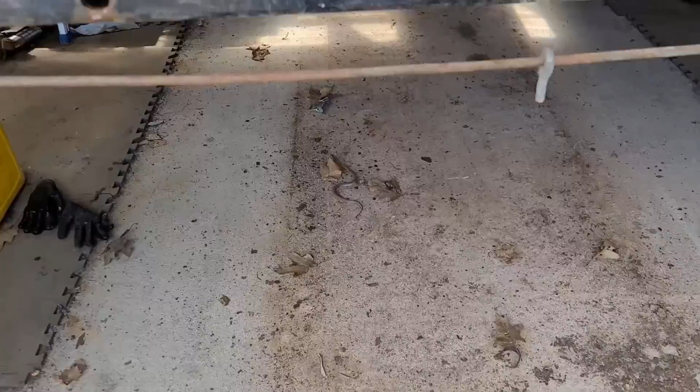We are the 12th of April, and what I'm going to be doing is changing out the upper control link on the 07 Dodge Nitro. Unfortunately, I've got to drop the fuel tank to do that. So of course I've scoured YouTube trying to find somebody who's done it, and nobody has. So guess what, this will be a first.

It couldn't be simple like that one over there, like the one I just took out of another Nitro.

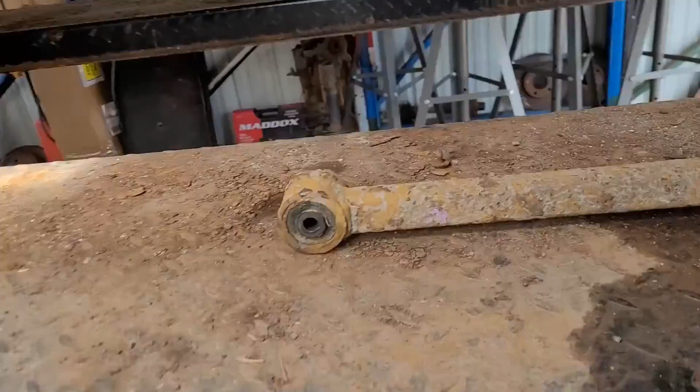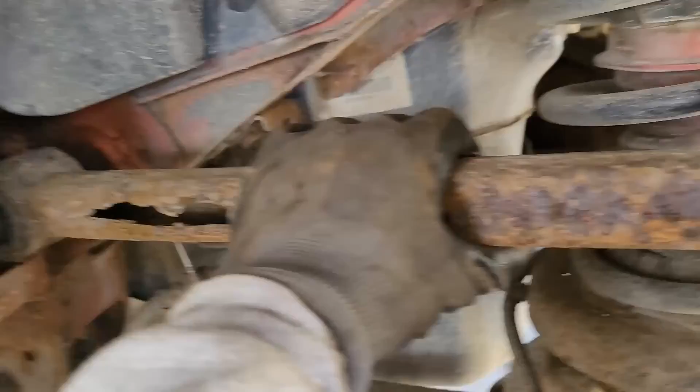So this is what we're replacing, this link here. First thing, we gotta get the wheel off. Okay, remember right now the wheel's off. And this is the link that we're changing. You see that? Isn't that freaking beautiful? Check your vehicle, this is an 07. So the other links look good, even the passenger side upper link is in good shape.

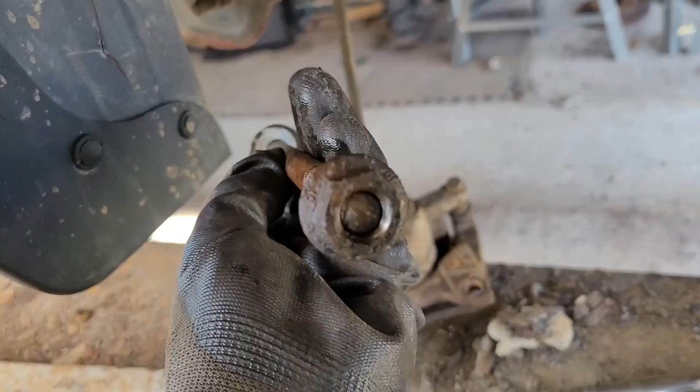So what we got here is 18 outside, 15 on the inside. 18 outside, and this is what it looks like. Okay, so you get 18 on the end. This goes into a slot in the frame. Okay, there's no nut on the inside, so unfortunately what you do is you pound it through.

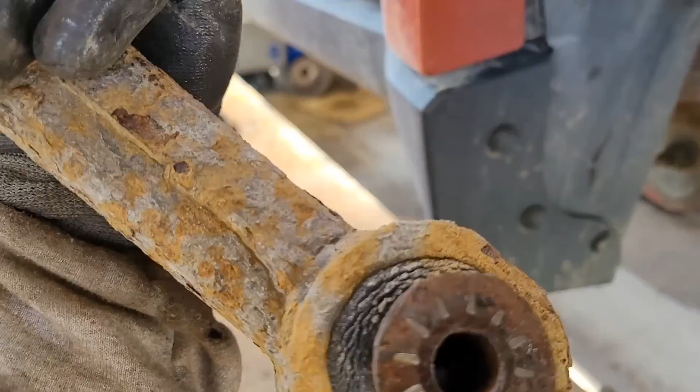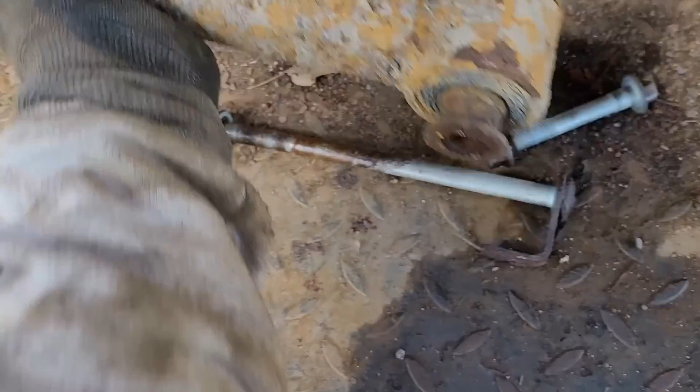See, what you're looking at here is that. So you get this big sleeve, and what happens on two of them that I tried to get this off of, your bolt locks itself inside that sleeve. It doesn't pivot, because it pivots the rubber, the rubber is what pivots.

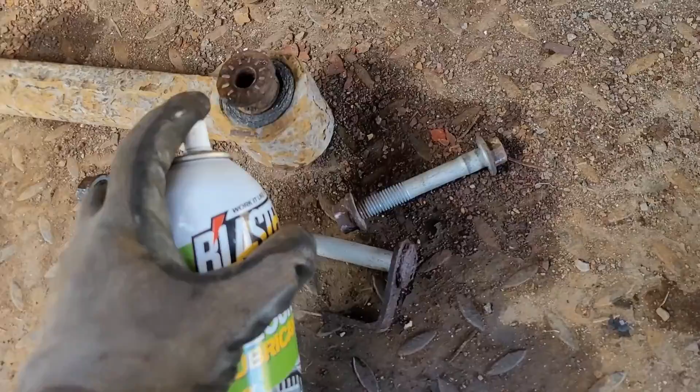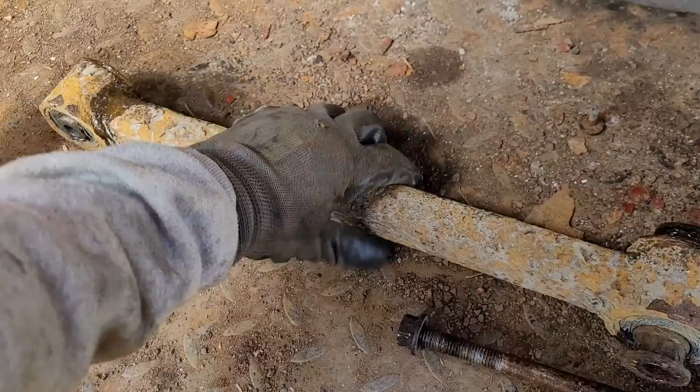Let me get some silicone and I'll soak it into that rubber. Yeah, I'll give it some silicone. It soaks into the rubber, makes it last a little bit longer. Alright, so there we go, we'll get that in there.

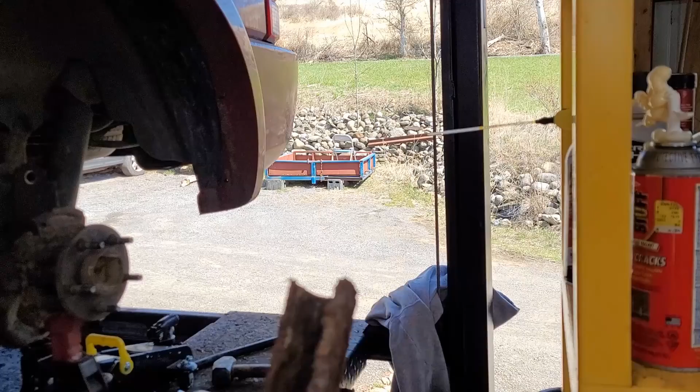And I think what I'm going to do, I tried pounding on that, I can't get it to break loose, so it's definitely frozen in there. So I'm going to wind up cutting it. I decided to go ahead and cut it off. As you can see, there's nothing, absolutely nothing left of that thing. That could break at any time.

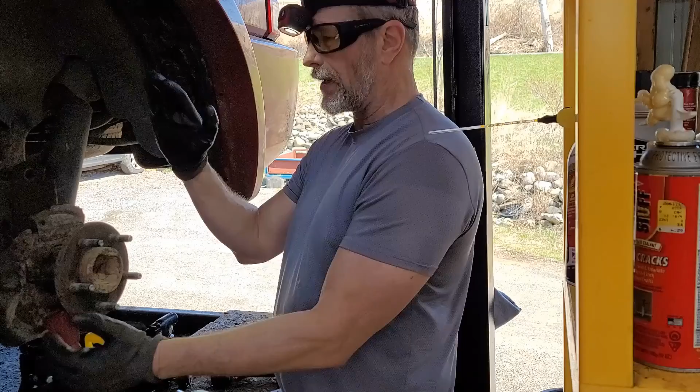That's all this weight here. As you're going down the road, when you step on it, you're getting the torque going like so. Or let's see, you step on it, the wheel's going like this. So all it is, is shoving this way.

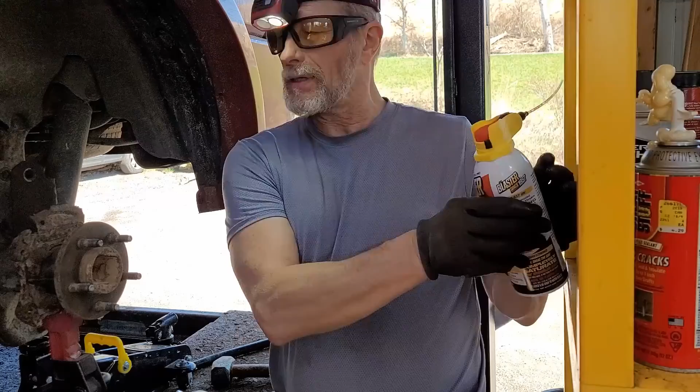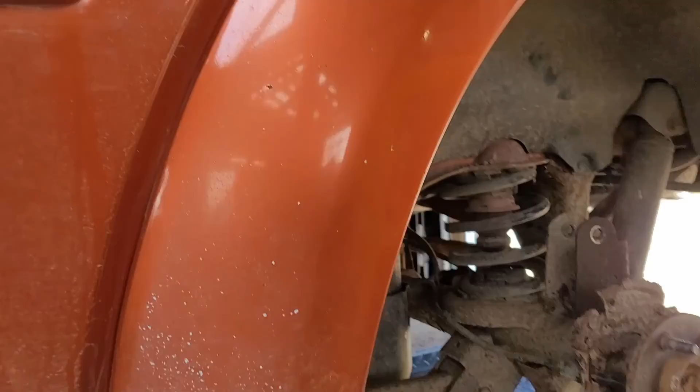Alright, so right now I'm cutting the bolt, I hope. Just kind of making a lot of sparks. Okay good, that didn't take long. I'm using a carbide blade of course, and that just actually zipped that bolt right off.

I thought it was a high tensile bolt, but I guess not. I guess we'll zip right on through it.

And now it's time, I can't get up close enough to the body to... that sounds like a Mustang. Well, guess not. Alright, so that's where I'm at right now.

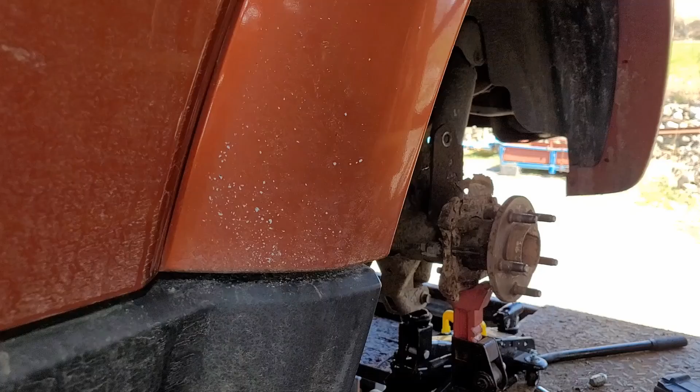We'll go ahead and get that, get the inner one. This time I gotta cut through the bushing and the bolt, because this is not being nice.

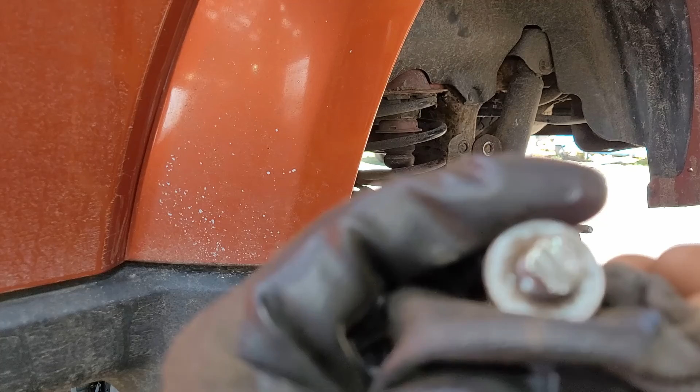Alright, here's the bolt, it cut right on through that like butter. Problem is, it's so tight you can't use the whole blade distance, you only use about an inch, two inches of blade.

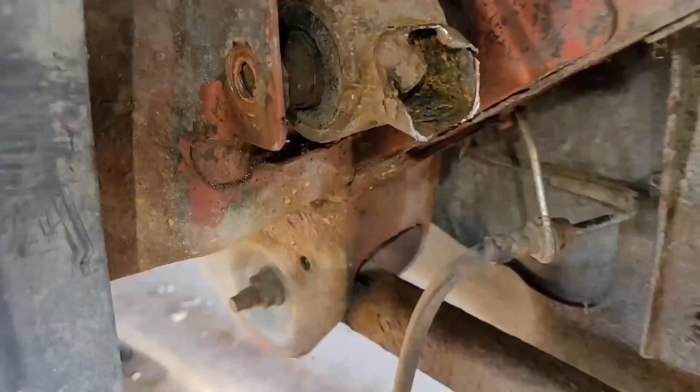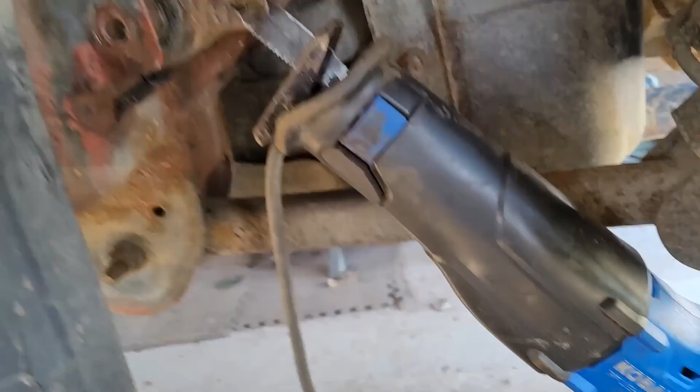Alright, so right now I'm about halfway through. Alright, I'm three-quarters through. Unfortunately that's cutting the freaking bushing and the bolt. Man, it's a bad spot, and it's hard to control the trigger speed on that saw.

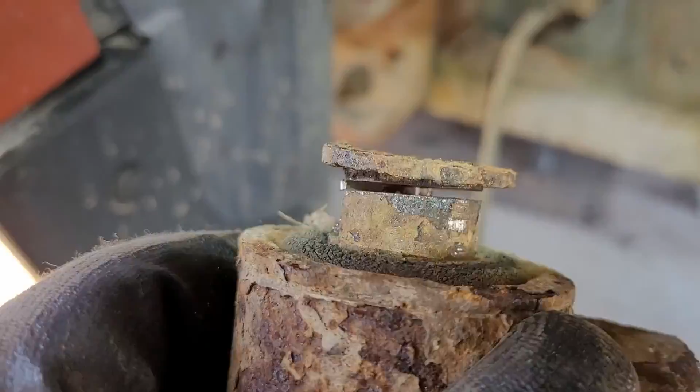Alright, after a half hour, finally got it to let go. That was nice, because once it cut, I didn't have to cut all the way through. I just cut all the way through the bolt, and that zipped it from that point, and now I can just pretty much push that bolt out.

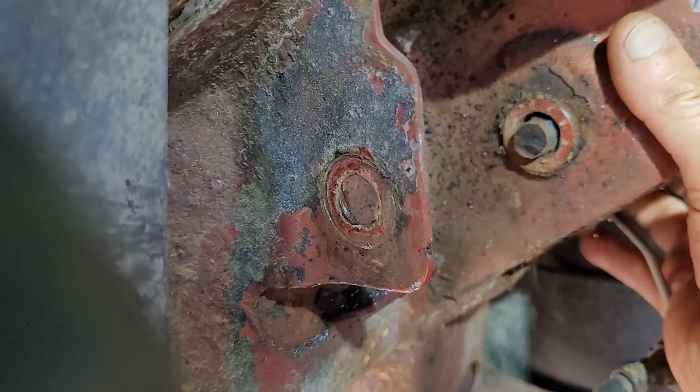Yep, now we just got the good old tank in the way. Let's see what we got, let's see what we can do, see how in depth that's gonna be.

The only problem is I think it's sitting in this cradle, so I'm doing those bolts. I hope I don't have any that break off, because that won't be a good thing.

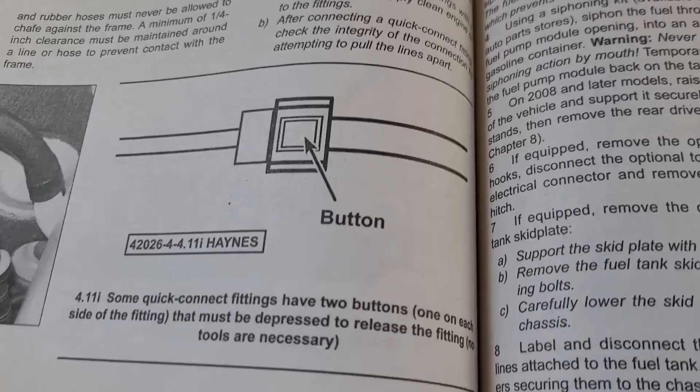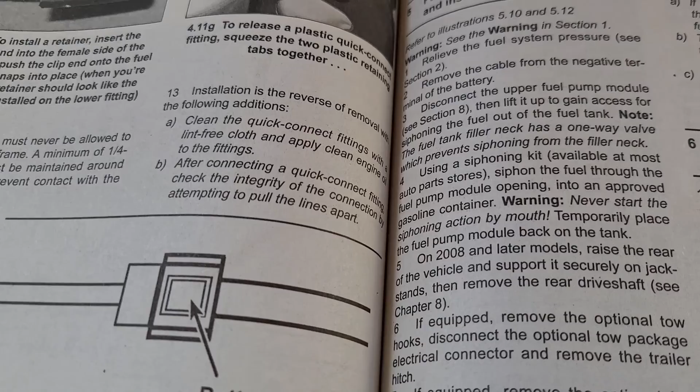All right, so we got to do the fuel tank removal. It says make sure you disconnect the battery. You should siphon as much fuel out of the tank as you can. Never start the siphoning action by mouth. Temporarily place the fuel pump module back in the tank.

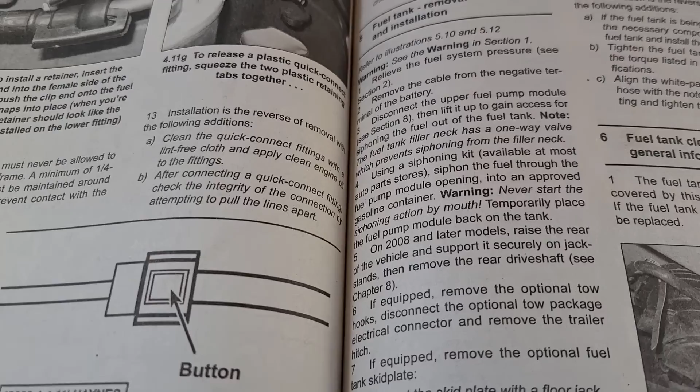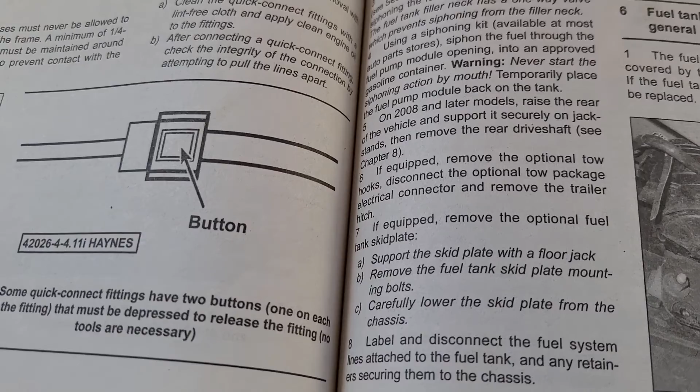08 models and later: raise the vehicle and support securely, remove the drive shaft. Alright, so I got an 07 and earlier. If equipped, remove optional tow hooks, so tow package, light, instruments.

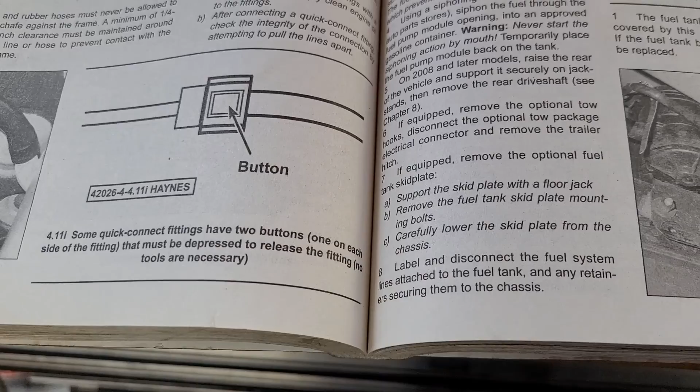Remove fuel tank skid plate - that's what we're doing right now. It's got, I don't know, 6, I have to count, 6, about 6, there were 15 millimeter bolts.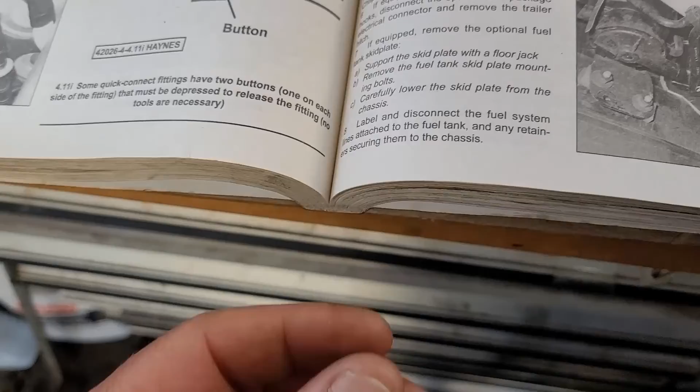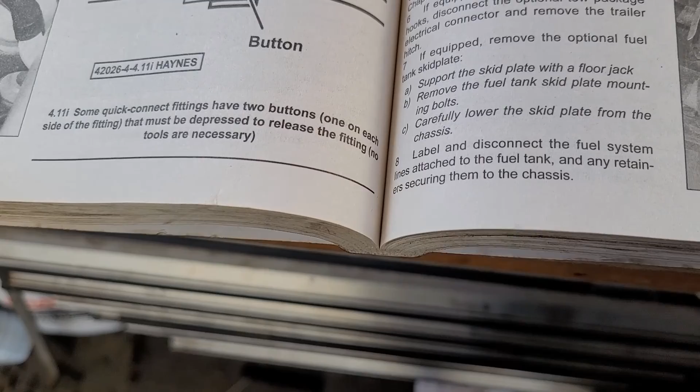Remove fuel tank skid plate, carefully lower skid plate from the chassis, label and disconnect fuel lines attached to the fuel tank, and any retainers securing them to the chassis.

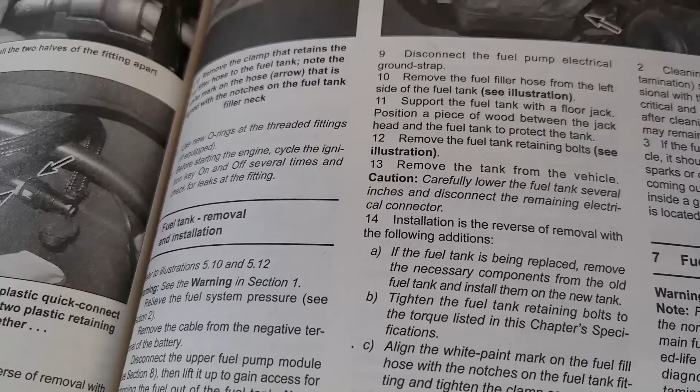Disconnect fuel pump electrical ground strap. Remove fuel filler hose from the left side of the fuel tank.

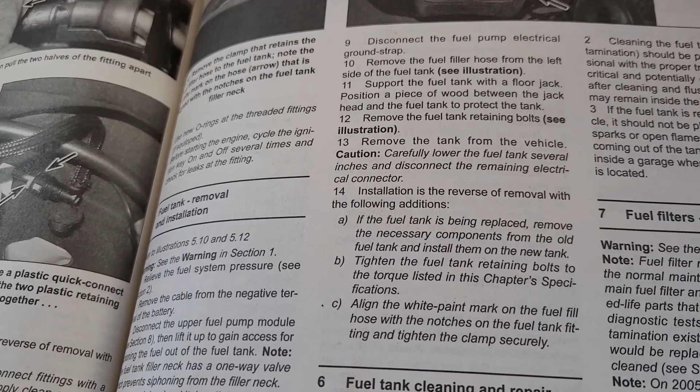Support the fuel tank with a floor jack. Position a piece of wood between the jack and the head of the fuel tank. Remove fuel tank retaining bolts, move tank from the vehicle. Caution: lower fuel tank several inches and disconnect remaining electricals.

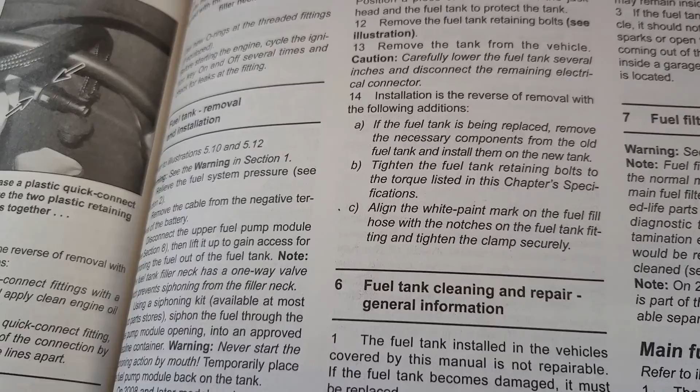Installation is reverse. Now I'm gonna try not to have to drop that tank too far. Hopefully I'm not gonna have to move the clamp.

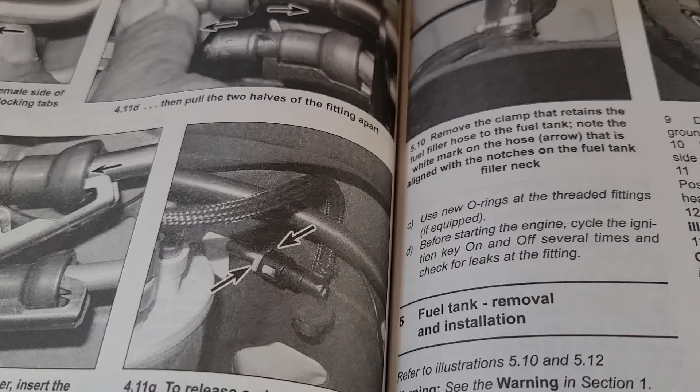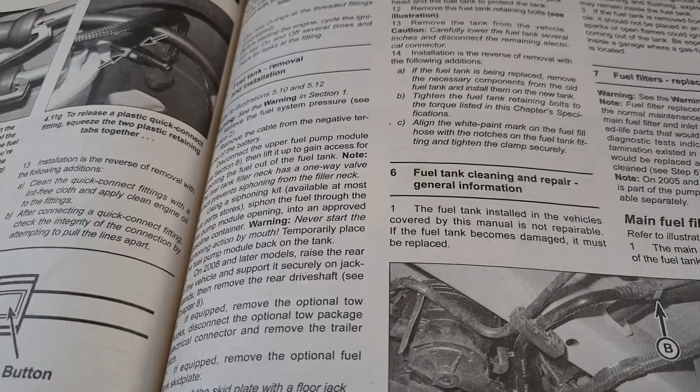Note the white mark on the hose that is aligned with the notches on the fuel tank filler neck. Okay, keep that in mind. Hopefully I just need to drop it down a little bit - I'm not removing the fuel tank, so we'll see how far we can get.

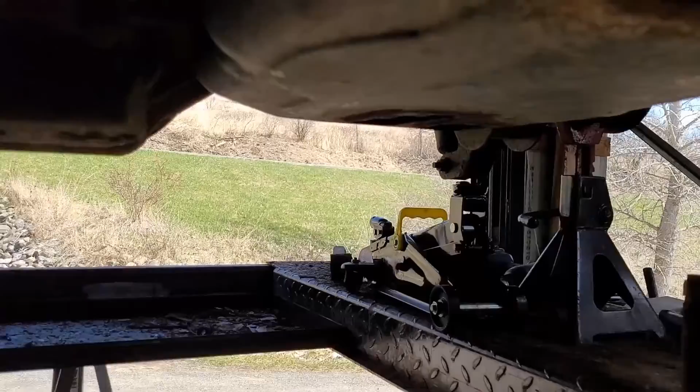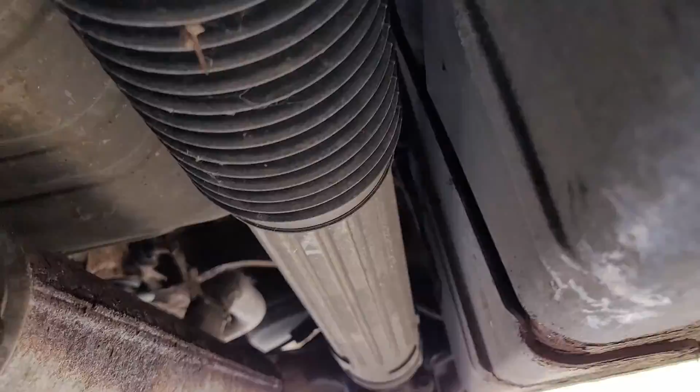Okay, we got a bolt right here, and we jump up with a bolt there. Let's see what we got on the inside. See the bolt, it's like a bolt right there. Yeah, there's a bolt right there, and I got another one over here. Is there one? There's 2 here, it's like there's 2 - one right there, one right there.

So it's gonna get, it's only that skid plate. Alright, this goes right to here, and then of course got those bolts there. So let's get that dropped.

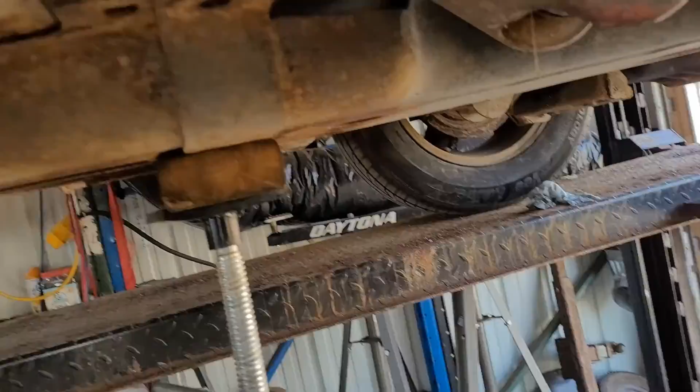Okay, be careful when you're taking these out. I've gotten two out of 3 to come out fine. This one broke off, so now I got a middle one. That's the skid plate, so I've got 3 more. So you got a total of 6.

I got 3 more on the inside, then I gotta get off. Get this one here, I got no problem. Middle one broke, and then this one here is fine.

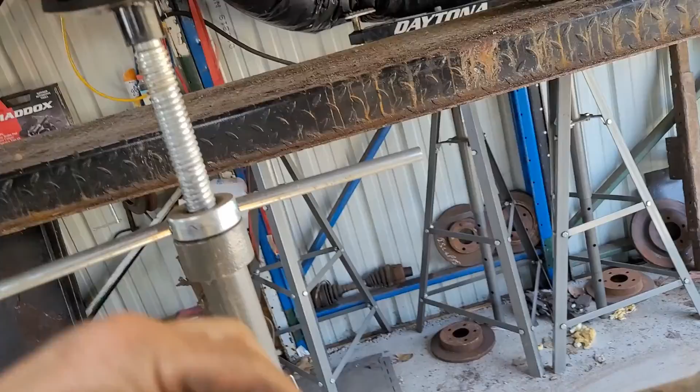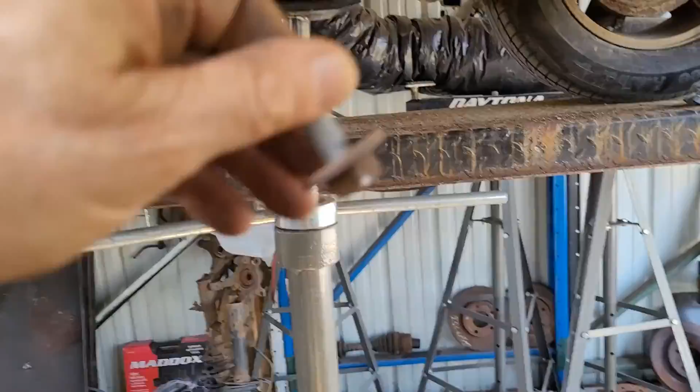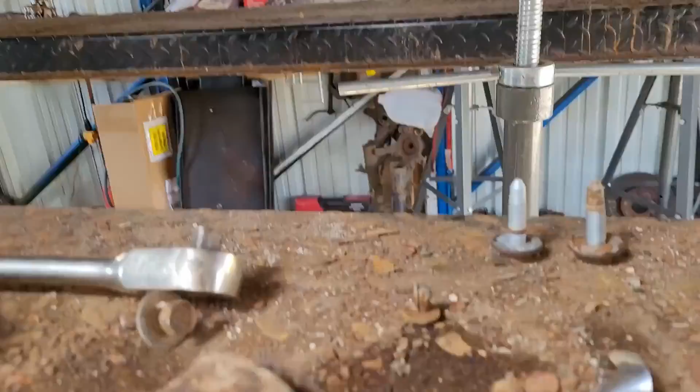All right, I wasn't sure, but because the heads were covered with rust, so I was kind of leery. I didn't think I was going to get them out, but because it's in the center of the vehicle, you're not going to have the rust issue like you do on the outer frame. See, the frame is exposed, see, so that being on the inside.

So there's only 2 on the inside. So we are done, all I gotta do is drop it.

Alright, well, it lied to me. It said the tank was strapped up there. Well, it's not strapped up there, it's actually sitting in its skid plate.

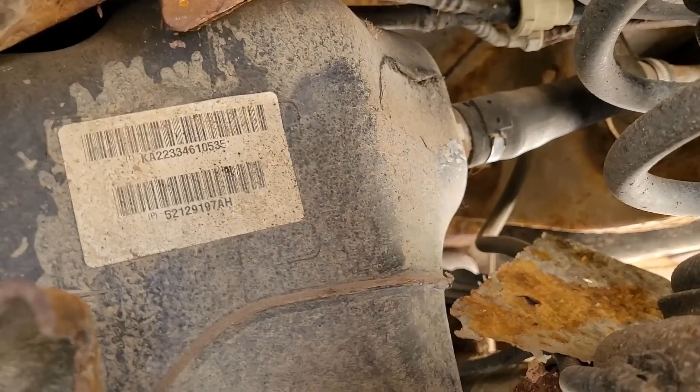Looks like I just got to undo the hose going into the fuel tank. I should be able to drop it down far enough to clear that hole. I get that new bolt in there - all I got to do is get the bolt in. If I get the bolt in, I'm done. I don't have to worry about doing anything, because it has its own little lock that goes into the frame. All right, I think we got it.

Then move that out of the way, and now I'm able to shove the other one out. Go right at it. Yeah.

All right, I gotta get something to stand on. I keep bringing it down. I've got the tank down about as low as I can get it.

I didn't remove the... sitting on the thing. All right, you can actually see what I'm doing here. Alrighty.

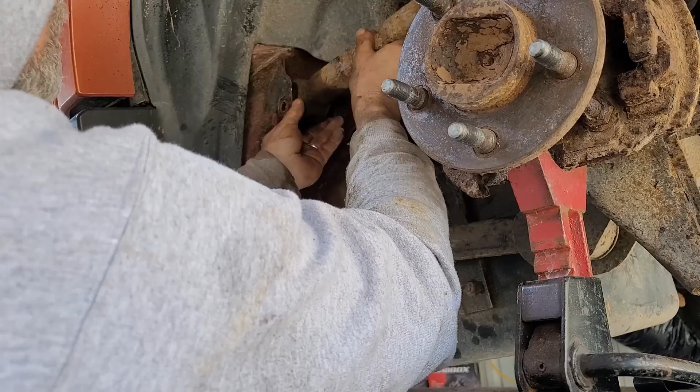Line the bolt up. All right, you're right there. Where's you at? What the hell? Oh, wait a minute, something right?

Put some more penetrating oil inside that. All right, moment or two there. Oh man, I gotta see.

I gotta find something to keep that pushed over out of my way for a minute. Shove that tank as far over there as I can get it out of my way, as I get my hand up in here.

All right. What's the joke? What's this thing sitting on? It's got itself caught on a freaking line.

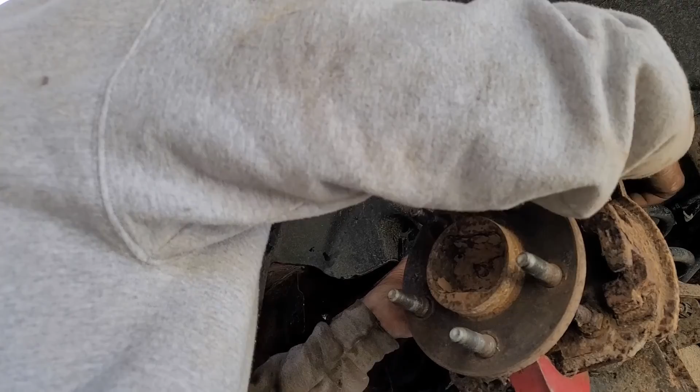Here's this bolt here. Bolt here, you gotta go into this side. So come up by here. I don't know about that one right now. Let's get this one in.

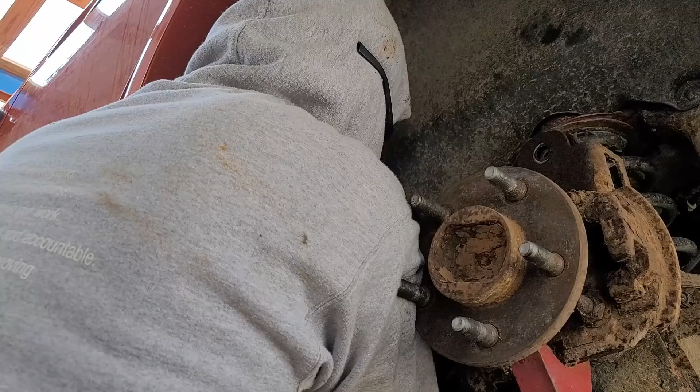Hey, get in there. There goes. Alright, find that. There's a slit that's up there. Right.

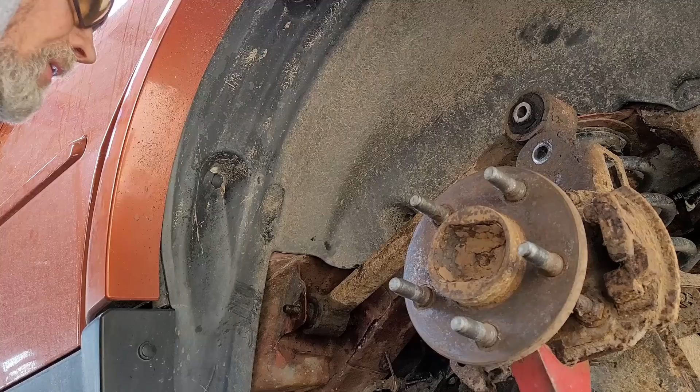My slit that goes in. There it is. All right. Now we get the tank back up. I loosened the washer on that one there, but all right.

Get me an alignment tool. Gotta put all the bolts back in, or jack that back up again. An alignment tool here. Go.

That's it. All bolts are in, we're in good shape. Awesome. All right. Man, that's awesome.

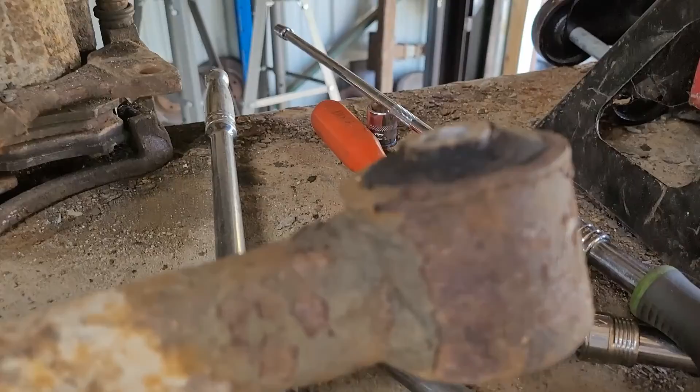Alright, I just gotta flip this around real quick. Save some video, because when I put it in I noticed, see how this side, how the bushing is pushed out a little bit and it's flush on this side. Well, I need to grab the old one and see how it's flush.

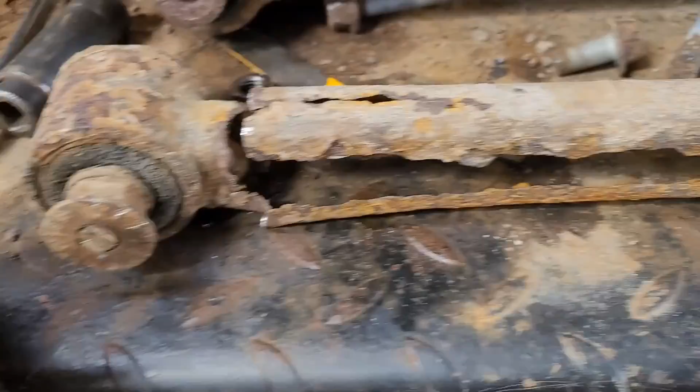This is the way it was. I just cut it off, so it's the way this one was. Also, no, that doesn't matter though. But the way this is set up, I want to make sure I had it the same way. So just keep that in mind too.

Okay, let's get these tightened up. I can deal with the tank last. Feel it locked in there. I'm good there. That is an 18. Next.

There he is. All right. There's my Safelite AutoGlass. They're here to freaking replace the windshield in the Explorer.

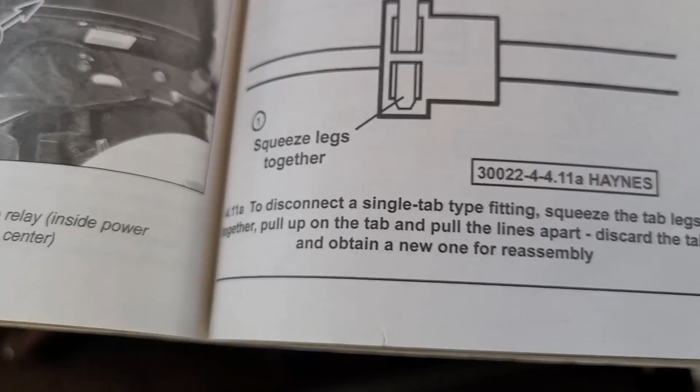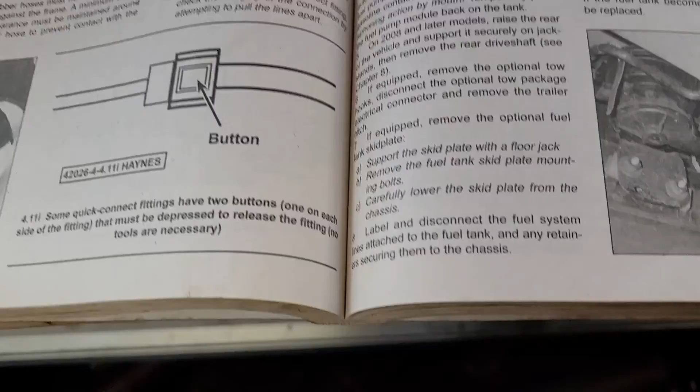Okay, fuel tank strap retaining bolts. Well, this doesn't have straps. It's actually in the skid plate, so it doesn't have. You don't get this, you got to remove it. It's in the skid plate itself. So once you put that in, we don't have to remove the tank.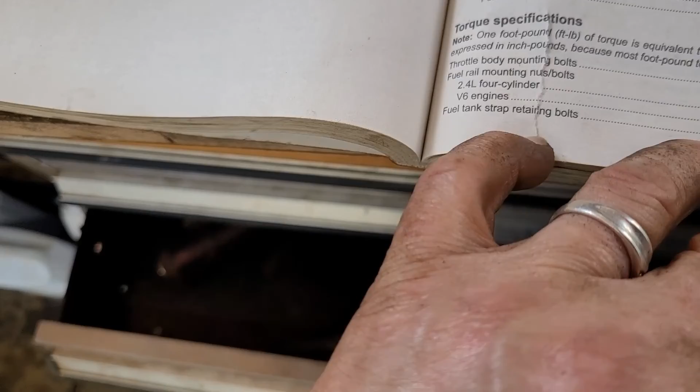Okay, you just got to undo that, drop it down a little bit, enough so you can get your fingers in there and change that out. Those going by the skid. I read my book. Going by the skid tank retaining bolts, 45 foot-pounds.

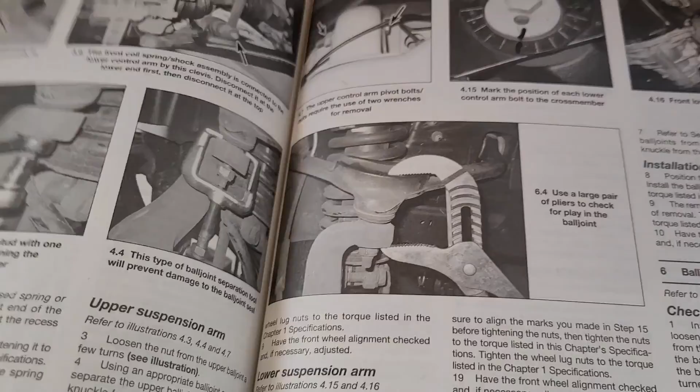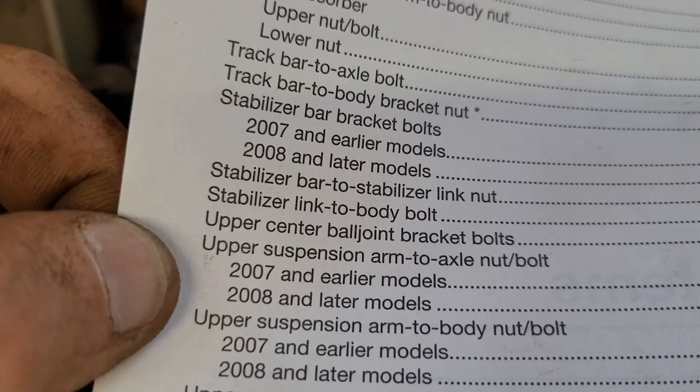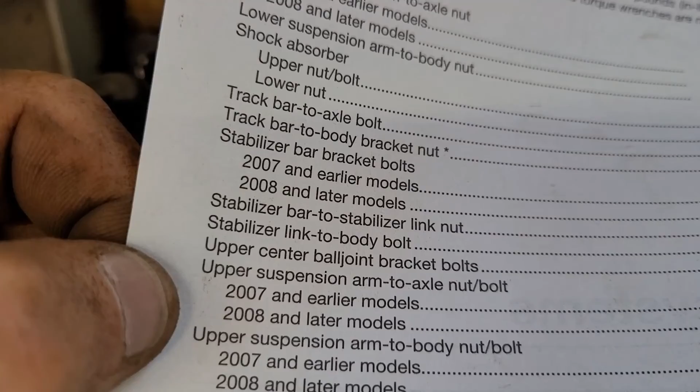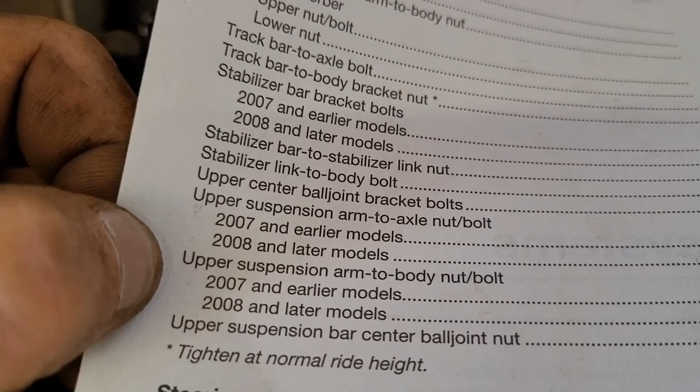Let's see, we got to go back to. Okay, now back to the suspension. Stabilizer, upper suspension arm to axle is 74 foot-pounds for 2007 and newer, or older, 2007 and earlier model 74. And upper suspension arm to body bolt nut is 74. So there we go.

We'll see if we can get this done before he gets the window in that.

Okay, on your Explorer is here. All right, very good. All right, so these bolts, these nuts. Oh my. These nuts here, these are way up there. Okay. Nut 74 to the body, 74. And that'll take care of that.

Wobble extension on here, I probably got it. Is that tight already? Oh, ow, ow, ow, ow. Yeah, you already got that tight. Oh man, that hurt. 74 here.

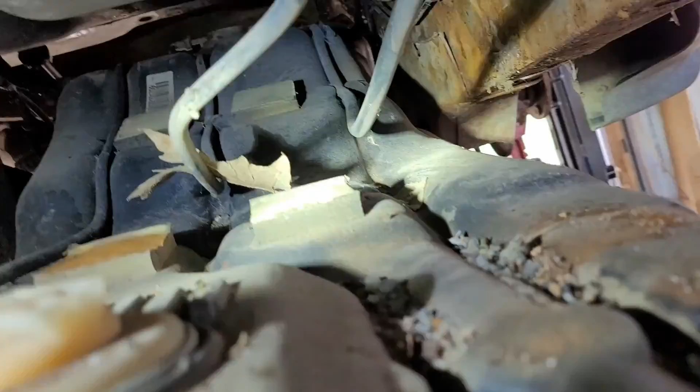Okay, just a quick review underneath before I put the tank back up. That's what it looks like without the tank. These weren't in the way, but if you're going to drop the tank, you'd have these lines here you'd have to disconnect, and some stuff on top.

Let me take you in, and I'll shoot some light on. There's the bolt that goes through. As you can see, there was plenty of room to get that by just dropping the tank a little bit. Again, this does not have straps. This is being held by the skid box.

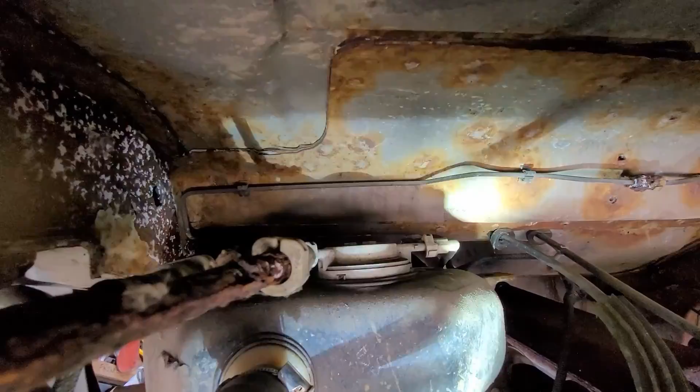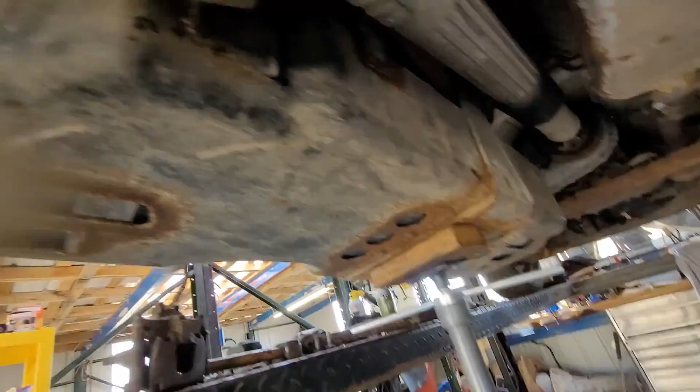Now on the back side, what I did is I pulled that bolt right there, you see it? Pulled that bolt so this would flex. And then up here you got like two other things you'd have to disconnect if you were to drop the tank, and of course the actual line itself you'd have to drop too. But I didn't have to do that. All I'm gonna have to do is jack it up.

As you can see, my freaking Harbor Freight jack stands have paid for themselves again. It also says something about you got to drop the drive shaft on the 07s or the 08s. They're newer for some reason.

So we go. Getting closer. Crap up here. All right, up. I've got a gas light, so I know I've got about 3 gallons in here. He's got lines, places they need to go, huh? All right.

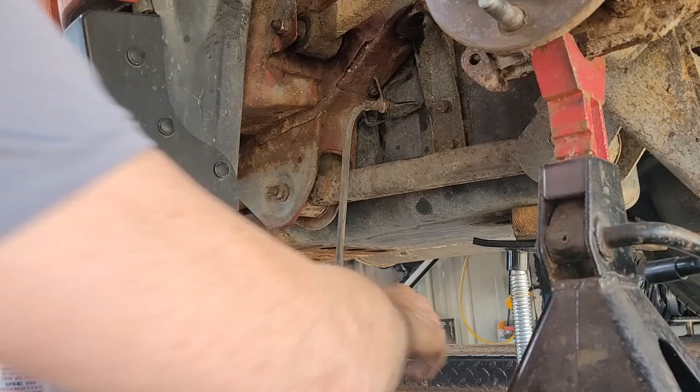Guides, all right, so we are. Stay tuned. All right, my last bolt. Use this puppy here to get her up there. All right, this will finish putting the tank back where it belongs. I said they're 40 foot-pounds. And that's all this thing will do.

And there we are, all done. Wow, was that a chore? Okay, I'm gonna just get the car back on. Well, put the rotor back on, brakes back on, and we will be done.

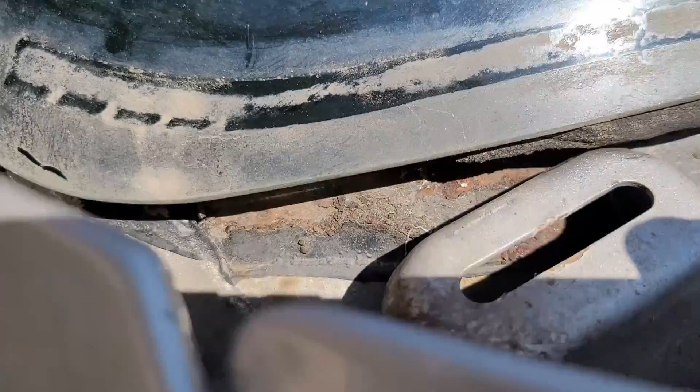All right, well unfortunately getting the windshield replaced today is not going to happen, because Safelite has a liability setup that if there is any metal that has pulled away from the area where the windshield goes in, they can't complete it. You want me to pick that up for you?

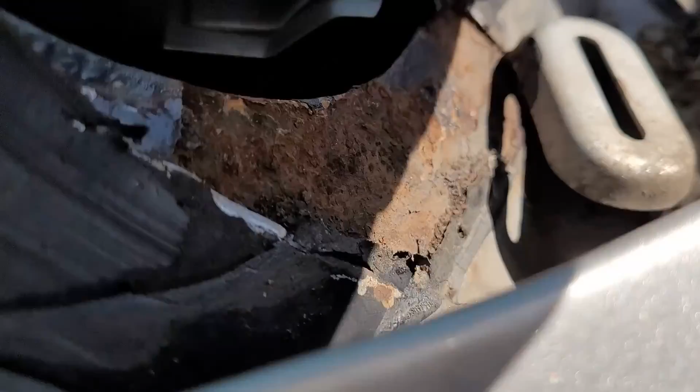Yeah, if you would, see it? And this is what he's looking at. If you've got this on the bottom of your windshield wrap, when they go to install it, you're going to have to find another company to do it. So you won't know that until they pull the window.

So you'll have to find another shop that'll actually do that for you. It can be done, they'll just have to probably grind it down and TIG weld another piece of metal in there so they know it's clean. And then they'll be able to do the window for you. This was a Geico claim on the window, so they'll go ahead and cancel the claim, and you'll be able to go ahead and give the claim to another repair shop. So there we go, unfortunately another setback in getting this 03 Ford Explorer on the road.

All right, tires going back on, and we are done back here. We're done with the brakes. The only thing I got left to mess with is try to figure out why my horn isn't working, whether it's back to the freaking clock spring, or I actually have a grounding situation going on with the horns.